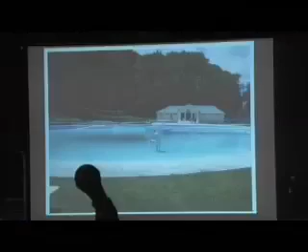As you mentioned, Mark, this memo was originally done in July of 2007 with the same effort to update. I actually sent it to the Board of Selectmen back then, as well as all the various committees, Warrant Committee, Capital Budget Committee, all of the various groups in town, Permanent Building Committee, back then as well. I've updated it. Unfortunately, there's not a lot to update in terms of improvements or changes, but I think it's worthy. You should go through the memo and the timeline, you know, how old it is. Yes, the effort is still the same as you mentioned.

There is no long-term plan for this facility right now, which is the purpose of this memo. The timeline and history: in 1911, the land was transferred from Henry Underwood to the town to develop a public playground and swimming pool.

In 1912, the town meeting voted to call it the Underwood Playground. On June 17th, 1912, there was a formal pool opening. The pool was designed by Loring Underwood, with a cobblestone and sand bottom, and sand banks with a stone island in the middle featuring a diving board.

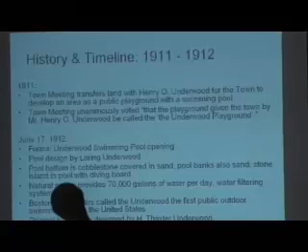There was a natural spring providing 70,000 gallons of water a day, along with a filtering system. Boston newspapers called this the first public outdoor swimming pool in the United States. The bathhouse was designed by H. Thaxter Underwood. The photo you see is from about 1913.

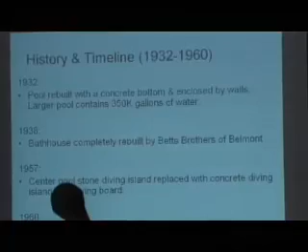In 1932, the pool was rebuilt with a concrete bottom and enclosed by walls. This larger pool now contained 350,000 gallons of water. We have a photograph of that as well—you can see the edge of the concrete there, different than it is now, at the beginning of what it is.

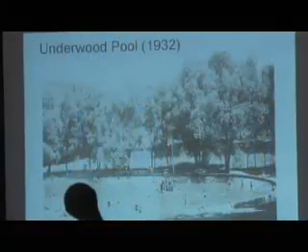In 1938, the bathhouse was completely rebuilt by the Betts brothers of Belmont. In 1957, the stone diving island in the pool was replaced with a concrete diving island. In 1960, the filter house was, I believe, relocated and rebuilt.

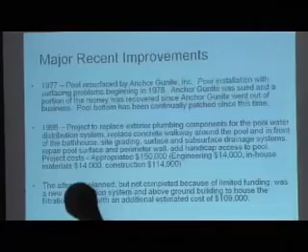Looking at major recent improvements a little while ago, I was saying it's like the first 50 years and the last 50. I don't know if 1977 is recent, but recent improvements: the pool was resurfaced—the concrete bottom was resurfaced by Anchor Gunite.

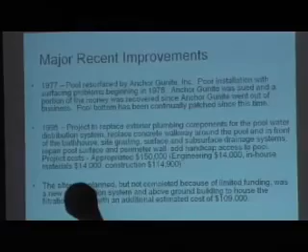There were problems with the installation beginning the year after. They were sued, and a portion of the money was recovered. Anchor Gunite went out of business, and the pool bottom has been a continual problem since then, patched just about every year, as many of you know.

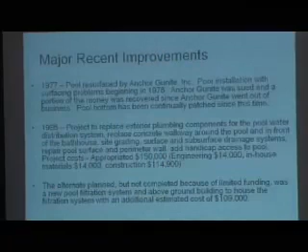In 1995, we were appropriated $150,000 to make some improvements. There was no public works department at that time, but as the highway department then—I was the highway superintendent—we assisted with some work there and did some of it.

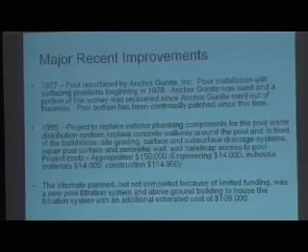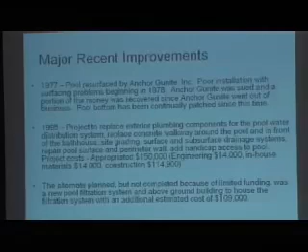Basically, they replaced the water distribution system, but not the filter house, the concrete walkway around the pool, and did some site grading, some drainage, patched the pool surface, the perimeter wall, and added handicapped access to the pool. An alternate plan, not completed, was to raise the filtration house above ground and add a new filtration system, but that was not completed—it was estimated at $109,000.

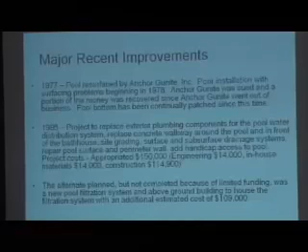There were two studies done on this pool: one in 1988 by Mace Incorporated, which was McKinnell and Taylor, and a 2002 Edwards and Kelcey facilities audit on the bathhouse only.

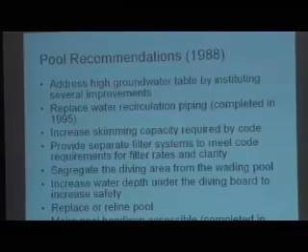I don't want to repeat myself here, so I'll try to just address some of the major issues, but you'll see them repeated by the Mace study as well as the Edwards and Kelcey facilities audit on the building, and later by not only the health department's concerns back in 2002, but also the staff of the maintenance Parks Department.

The pool recommendations were to address the high groundwater table by instituting several improvements. There were some choices about raising the pool up higher or rebuilding it in a different method with a much thicker bottom, and replacing the water recirculation piping, which was completed in '95.

Increase the skimming capacity—that has not been done. The filtering system has not been improved. Segregate the diving area from the wading pool—that was kind of segregated, but they recommended complete segregation. Also, increase the water depth under the diving board.

Replace or reline the pool, as I mentioned earlier, and make it handicapped accessible, which we did in 1995. For the bathhouse, several issues: cracks in the foundation, add sanitary fixtures and showers—more showers for the number of users.

Provide hot water for the showers, which was actually done in 1995, or later than that, I think. Increase the size of the water and electric services, and provide a first aid area—those things still have not been done. Enlarge the structure of the building itself and provide handicap access to the bathhouse functions—those things have not been completed either.

Edwards and Kelcey did a facilities audit. The bathhouse was one building among many that Edwards and Kelcey looked at, within the town.

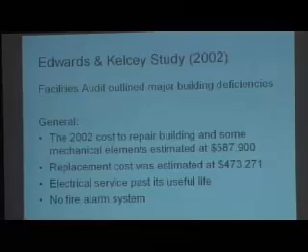They estimated the improvement to mechanical elements in the building itself was $588,000, and the replacement cost was estimated at about $473,000. The bathhouse again has many of the same issues, without repeating them.

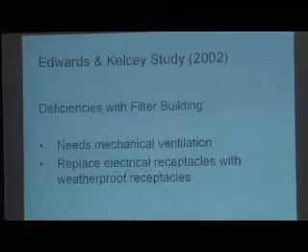The filter building, mechanical and ventilation for the filter building, as well as electrical receptacles and weatherproof electrical receptacles, which has not been done.

In 2002, the Health Department wrote a memo to the Building Services Department, because at that time the pool was under their jurisdiction. Public Works became responsible for the pool in 2003, and many of the Health Department concerns about the bathhouse, the pool, the chemical storage, and filter house were the same issues that I've already stated.

Peter, if you might, explain the bottom, because this is something you always explain to me, in terms of where it currently sits. This is bottom in disrepair, loses water, poor location. Can you just explain that?

Sure. The pool was originally a swimming hole fed by a spring. It's right next to the brook.

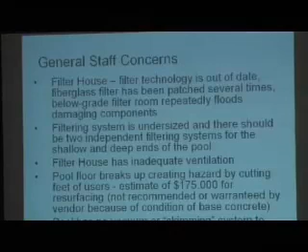The concrete walkway right adjacent to the pool on the Concord Ave side looks like a walkway, but that's actually the top of the culvert of the brook. The brook runs behind the library into a closed culvert, runs under there, takes a left onto Cottage Street, out to Concord Ave, and daylights at the, and feeds the Clay Pit Pond.

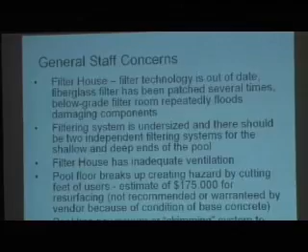So the pool itself is below the elevation at the bottom of the brook, which means it sits in groundwater all the time, with groundwater pushing up on it. So it's very difficult — when we pump the pool down, we have to keep pumping it because the groundwater keeps filling up the pool.

When we fill the pool higher than the groundwater level, as it is now, it keeps draining out into the ground, and actually goes into the filtering system, which is about 3/4 below grade, in the building on the end opposite the bathhouse, that small structure you can see just sticking up a little bit. We have 3 sump pumps in there all the time, pumping water mostly from the groundwater in the pool back into the filter system to maintain this cycle of trying to keep the pool fed, because the pool is not watertight, so it both leaks water and water comes up in it depending on the height of the water in the pool.

So the bottom is not watertight, is that right? Right, and water comes up in it depending on the height of the water in the pool. So during the fall and winter months, when the pool is closed, the groundwater fills the pool. The water you see in the pool is the groundwater. Do we continue to pump that out? We do eventually, and it doesn't freeze, I suppose.

In the spring, we have to pump it all out and clean it all, because it's dirty over the winter. Then we fill it, and as we fill it, we filter it to bring the water up to swimming standards. That takes a couple of weeks, and that's why later the health department comes over, checks everything, and then we open the pool.

Okay, and that, because of where it currently sits, has an impact on the bottom — does it continue to erode the bottom of the pool as well? Right, part of it. You mentioned that to me before — it's a great place for a swimming hole, but I don't think it's a great place for a concrete pool, in my opinion. Thanks.

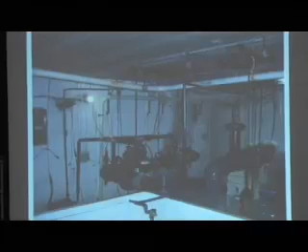That is a photo I probably missed, and I apologize if I missed some photos because I was reading my memo, but that is the filtering system inside that pool house, which is 3/4 below ground. What you see in the foreground is actually the container that houses the filter itself, and the piping is mostly the supply and suction for the filter, feeding the pool water.

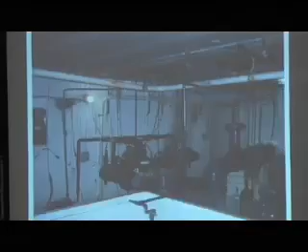That's another picture of just the other side, same thing — you can see the electrical wires, you can see what they used to call a Rube Goldberg there in the panel in the middle.

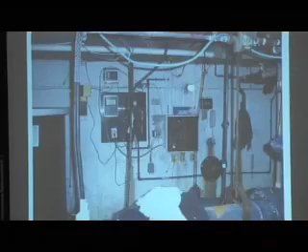Not very modern, to say the least. This is the base of the pool. Every spring we have some kind of issue with the base, where the pool surface—that gunite surface, that thin layer of gunite, which is really just a concrete that sticks to the pool—comes off.

The water pushes it off, and it's age as well. What we do is scrape all the loose parts off, then use hydraulic cement to fill it all in, let it dry, and then paint it again, and fill the pool and hope it lasts for the two months that the pool is open. You can see that's filled now with cement, getting ready for painting.

That's just deterioration on the corner. Peter, does that deterioration at the bottom of the pool happen during the summer months? Yes, it does. The health department mainly gets complaints, but we do as well, as does the recreation department, about people that find the bottom uncomfortable and have had some minor cuts and scrapes. So that's really become, unfortunately, standard.

That's showing some of the deterioration in the wall at the back of the platform, the diving board. That's some deterioration on the railing on the handicapped access that was actually put in '95. All these things have since been repaired, of course.

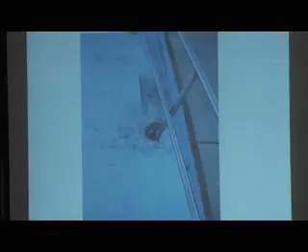These pictures were actually taken in 2007, not for this presentation—we had them in a file and I just brought them out to show some photos. Because by the time we scheduled this, the pool was filled. But you had to do that same work this off-season, the same type of thing every year.

Recent capital funding this year—we asked for some funding to replace the two electric motors which recirculate the water in the pool that I mentioned earlier, $11,000. We haven't done that yet, but we'll do that prior to next season.

I have to admit, though, there was some considerable deliberation on whether to fund it, considering the condition of the pool. But the capital budget committee—we spent a lot of time talking about that, convincing them about the need and the value of doing that.

I'll mention, this isn't on the screen, but I've added for the Board of Selectmen some financial information—basically the expense and revenue for the pool last year, in 2011. The pool netted a positive almost $5,800.

Planning—again, not to belabor the point—the memo and the original point of this, as it is today, was to talk about the need to plan for the pool. I have a concern that someday, no doubt on a day like today, a warm summer day, something's gonna fail in the pool, which is gonna force us to close the pool for the season. In order to avoid that, we really have to plan, and that was my request in 2007.

They also talked about the diving area itself, which is the true area of concern. Up on the screen, you see a profile of what a pool should look like. Ours doesn't look like that, unfortunately. But with that said, there are some standards that we need to follow. They're part of the state building code, not health code regulations. These are the design standards for the pools, which we need to focus on.

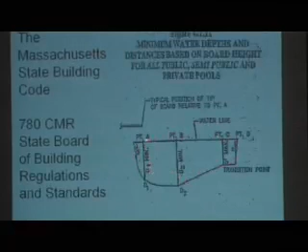Thank you, Glenn. That's a little bit better. That's the depth under the diving board, and that's the depth at the deepest part. Could you go to the next chart? So what we need to worry about is the height of the diving board.

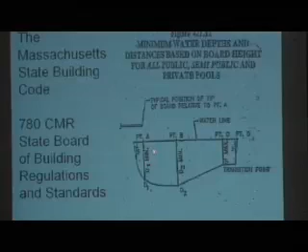If I could stop you for a moment - the last slide, was that what our pool looks like currently? No. That's what it minimum should look like - oh I'm sorry, here it is. These are the things that we could actually measure: depth under the diving board, from the State Building Regulations and Standards, figure 421.11, and then the deepest part of the pool.

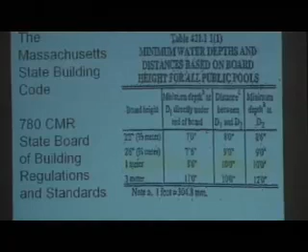Next one, please. So we were concerned about several things the day of the inspection: the height of the pool board to the groundwater. Maximum height that we can have is 1 meter from the pool surface to the bottom of the board. Our pool diving board is around 32 to 33 inches on a good day. The water level drops, we've got a greater distance.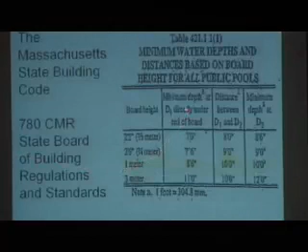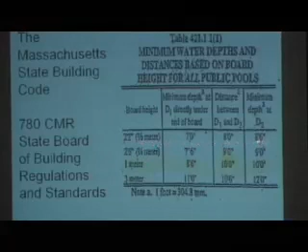So go back, please. With a 1 meter board, underneath the board you need 8.6 feet. You need essentially 10 feet of depth at the deepest part of the pool. If the board was a little lower - 7, 6, 9, and 9 - something that's almost right on the deck, you need far less depth. But we're in this area, because the board as it currently sits is roughly 32 to 33 inches from the water, so it's a little short of a meter. But it basically gives you a minimum depth of between 9 feet and 10 feet.

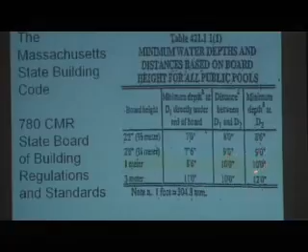Next slide, please. So this is what we did. We have some good data. We know the height of the board from the best day for the groundwater we've had is essentially 32 inches. We know the top of the island has got a benchmark of 100 feet, and we knew that we had basically 1.5 feet from the top of the island to the pool surface. We did our math, and we came up with a depth of the pool about 8.48, almost 8.5 feet. That's the deepest part - it's not a 10-foot pool, it's not a 9-foot pool, it's not an 11-foot pool. The deepest part, it's not even 8.5 feet.

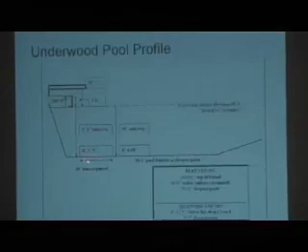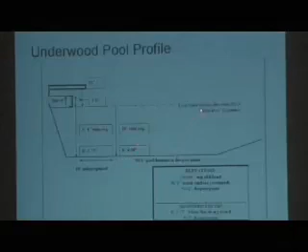Depth under the diving board is a little harder to measure just because of the measuring device we used. It's 8.75 feet, barely meets the 8.6. So this is our concern: we're diving into a pool on the best possible day that doesn't meet the standards we have to apply. And if the water level drops 2 inches, you're now talking about a pool that's 8.2 feet.

So those were our concerns. Part of our due diligence was to see if there's anything we could do about it. Peter and I met several times. We met with the operational staff. I've talked with DPW several times, as well as DPH several times.

There's really no recommendation we could make with the current configuration of the board to allow diving. If the board is lowered, there may be some discussion we could have, but as it stands now, we cannot make a recommendation that you should be diving into a pool that's not even 8.5 feet deep.

Can I ask a question? Yes, sir. So if the diving board were on the platform, does that change things? Yes, sir. So you had 32 inches, is that what you had? Less than that. If the diving board was at the platform, you would be able to dive at a minimum depth of probably around 8 feet 6 inches.

We don't even have that. At a good day right now, we have 8 feet 4 inches, 5 inches. If we lose 2 inches of water during the day, we're down. The closest we come to is the 22-inch height with what we have in depth, or the 2 foot 6 inches, which is 30 inches.